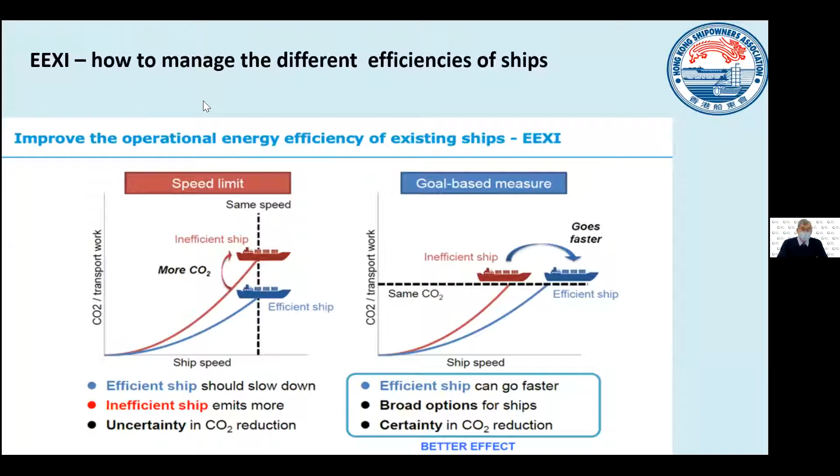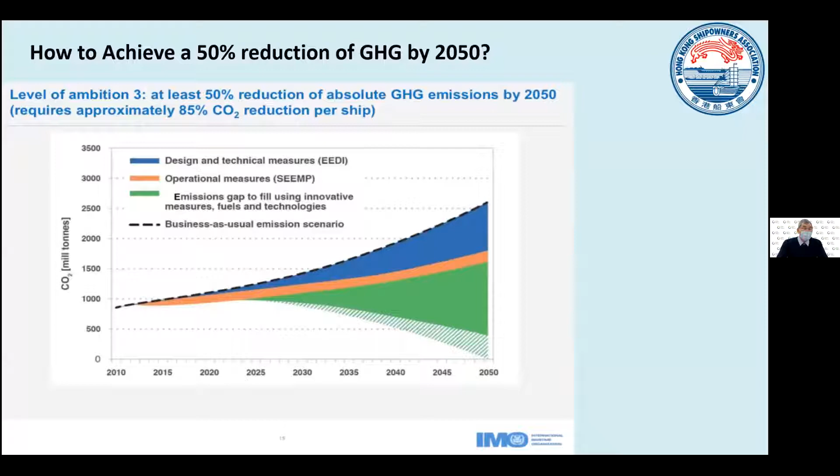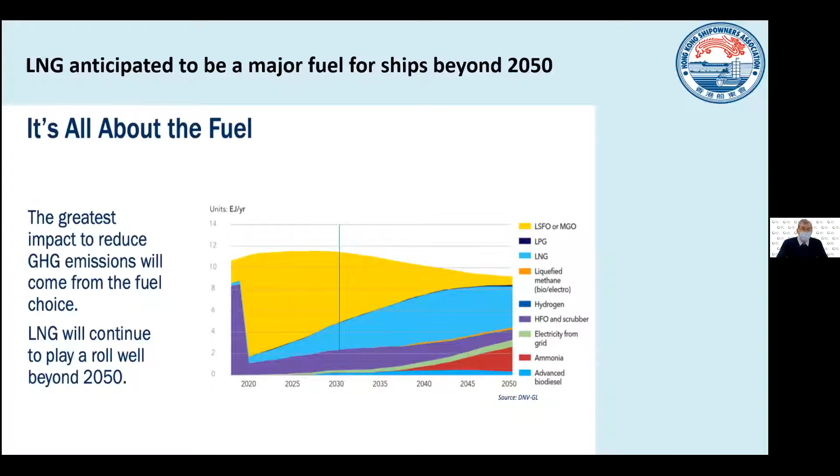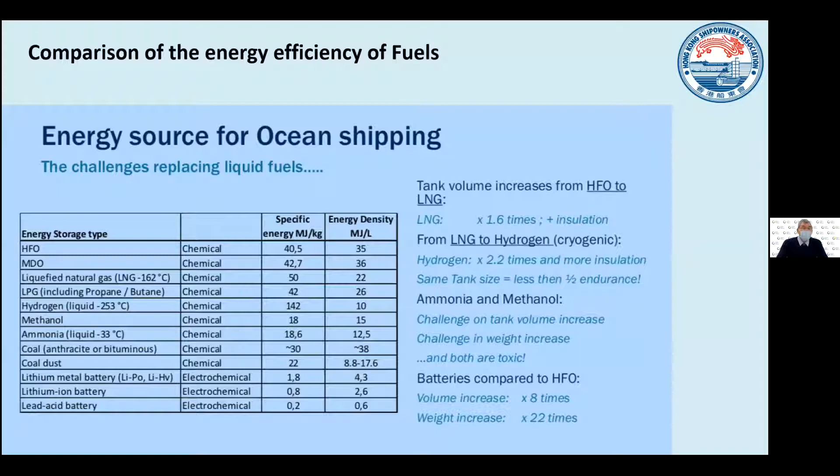Now, Clarksons has just come out with some quite interesting information, published in TradeWinds on the 4th of December, basically telling you how many LNG ships there are around at the moment. Excluding LNG tankers, they claim there's 227 LNG dual fuel ships on order, and there's 202 LNG ships trading at the moment. And the largest numbers are tankers, currently 34, and 72 on order.

Ferries, another one, 50 in service, 24 on order. Container ships are slightly lower, 11 in service, 30 on order. The offshore, well, there's quite a few there, but they're smaller ships anyway. But cruise ships is quite interesting: 7 ships in service, but 28 building at the moment, plus another 54 other types of ships.

The other issue is that there's actually LNG bunkering possible in 127 ports around the world, up from 114 at the start of 2020. Now, in most of these ports, the LNG can only be delivered by truck, which is very slow. So it's not really feasible for large ships to be bunkered by trucks. They need special bunkering ships, similar to the bunker ships used for bunkering oil at the moment. So the bunkering fleet is expected to double by the end of 2022, which is good news.

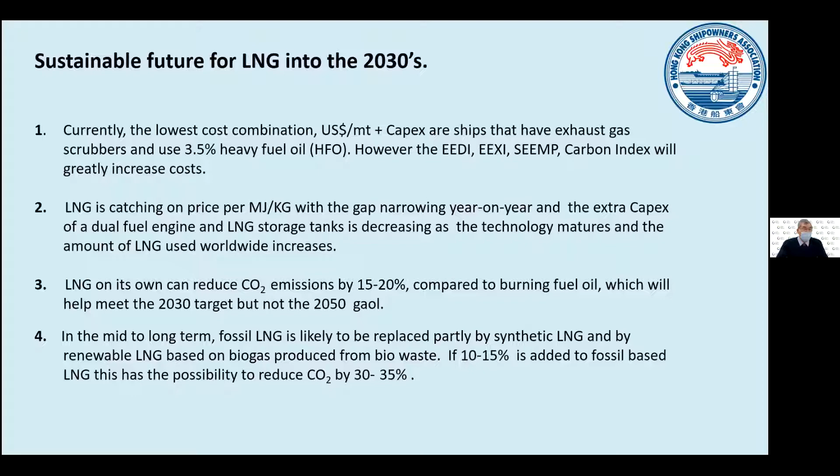Well, one of the reasons LNG can possibly continue is that if we can produce LNG from biogas and bio waste and mix it into the current fossil fuel produced LNG, that would increase the reduction of CO2 from LNG to between 30 and 35%, which is actually pretty good. But it's not going to produce 50% below, which is what we require by 2050.

So some outlook and conclusions. Well, LNG is definitely going to greatly assist shipping to get to the 2030 target, but on its own, it's not going to be able to get to the 2050 goal. So zero carbon ship designs are needed by 2025. They're well beyond the current state of the art. We do not have the technology at the moment. There's lots of talk about it.

There are some small ships being built at the moment to operate on hydrogen, but they're basically using compressed hydrogen at 350 bar at least. And they have to be bunkered virtually every other day. So this is not the technology which we can use for deep sea shipping, where we have long voyages and we need a lot of fuel.

So there's no obvious choice at the moment for alternative fuels, but we think that ammonia, sorry, where's it gone? Oops. Sorry. We think that ammonia is certainly going to be one of the main ones.

But one of the issues for shipping basically is we need to have a level playing field. So what we need is technically proven, safe and commercially sustainable new fuels, and we need regulations. And the IMO is going to produce those regulations. So we're looking forward to having these regulations which can produce a level playing field, which means that everybody can move ahead together and be basically relying on being competitive.

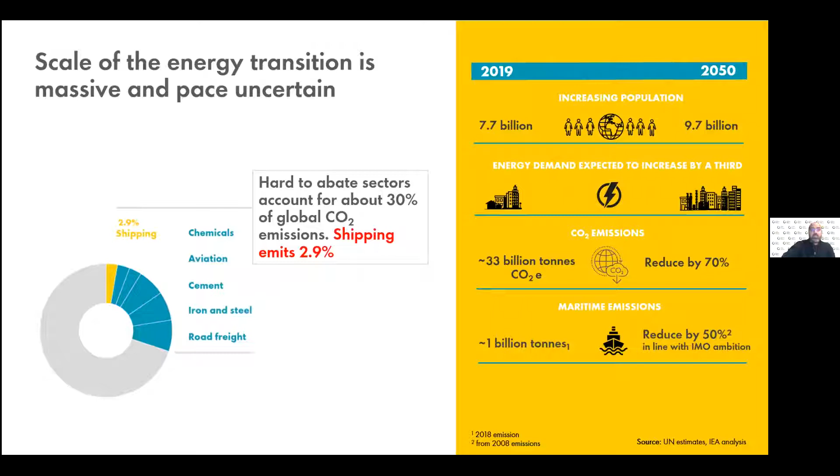Again, the scale of this energy transition required is massive for the world, but also for the shipping sector. Now, I think Mr. Cresswell mentioned that there's 50,000 plus, 55,000 merchant vessels. There's actually 93,000 vessels on the water. Again, the focus for us as well is on the commercial ships because they represent the majority of the energy consumption and as a result, the emissions footprint. So the scale and scope is massive. But the challenge to change is that much more difficult because of the underlying fundamentals of this industry. As I've tried to summarize in this slide over here, the switch to a decarbonized solution is going to take time, and it's going to take significant investment.

Let's not forget, this sector is just coming out of a major transformation. The industry went through the IMO 2020 change, which was challenging in its own right. And as much of a change as that was, the scale needed for the change to get to net zero is going to be that much tougher. Why? Because we're dealing with long asset lifespans, as Mr. Cresswell said. These vessels last 20 years, 30 years, 40 years. These are massive assets, so there's high energy dependency, and the complexity of electrification, as well as the industry being used to the cost of the fuel, makes the transition even more challenging.

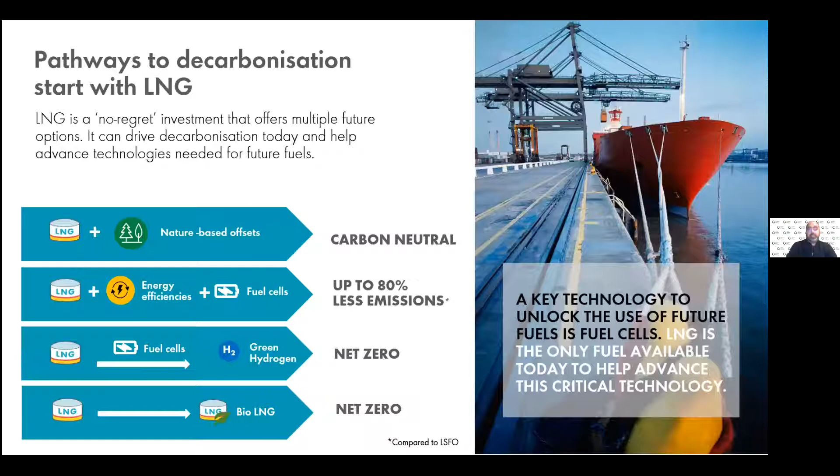Now, representing Shell, I have to do some shameless promotion as well. You may call this shameless self-promotion, but I consider this walking the talk. Not only are we converting our own fleet to LNG, we are committing significant investments to build the last mile infrastructure to make LNG available in key ports across the world. Mr. Cresswell showed that LNG is available at a significant number of ports, but most of it is from truck deliveries. What we're investing in is enhancing that capability and adding that last mile, the bunker vessel, to be able to do ship-to-ship operations. And we're growing that footprint at key markets globally.

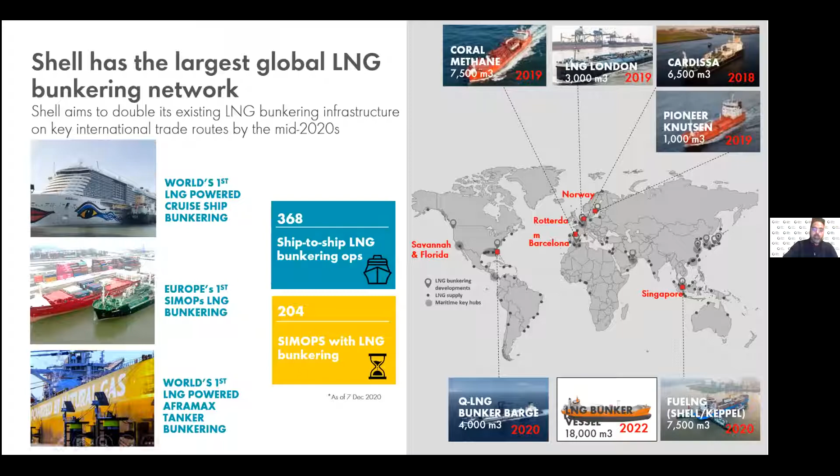So where does that take us? The Shell Deloitte study clearly laid this out for us. This is a collective problem that we all need to pull together to solve. Collaboration is going to be key to make this change to net zero footprint a success. The shipping industry includes ship owners, shipyards, class societies, financial institutions, regulators, end users of shipping service, etc. All these players need to work together in moving towards the goal of net zero.

Decarbonization needs to be the top priority of shipping industry's agenda, and it seems to be creeping up and getting there. Shell is ready and willing to play its part. We're working with others in the industry to look at how all of us can transition to a lower carbon future together. And we'll continue to work with customers as they adopt new fuels and technologies that help reduce emissions.

We're also working on decarbonization of our own fleet, as I talked about, but we're also implementing efficiency technologies in those assets as well. And we're continuing to invest in LNG as the cleanest, affordable alternative to traditional marine fuels available right now.

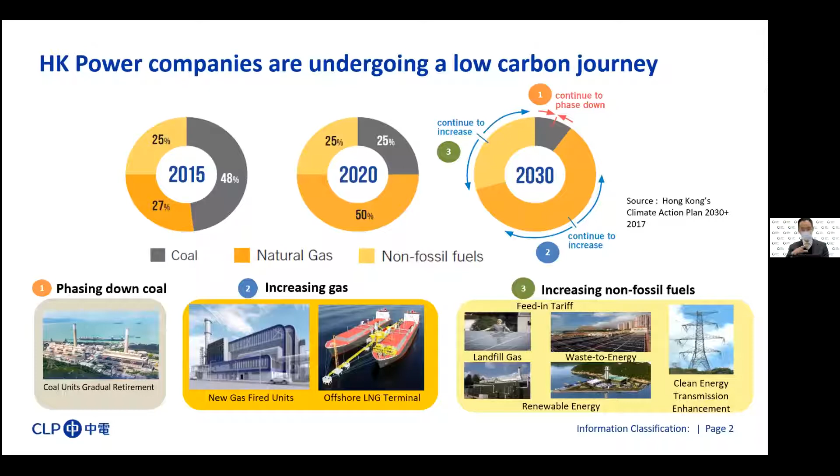There we go. Now, as you can see, to the south of Lantau, there will essentially be an offshore LNG terminal, which is in the form of a jetty, where there will be a floating storage and regasification unit, a ship that's parked more or less permanently, and then it will allow the LNG cargo ships to come into Hong Kong. And then there'll be two pipelines, one going to the Black Point Power Station of CLP, the other one going to Lamma Power Station of Hong Kong Electric.

Let me show you a little video of what that offshore LNG terminal looks like.

Are you not hearing music? If not, then I'll do

an impromptu coverage. So as you can see, the offshore LNG terminal looks like a jetty. It's essentially a jetty. On the right side, you'll see the FSRU ship. So you see the jetty here. And so on one side of the jetty, the FSRU ship would be parked, and it would serve two purposes. One is to store the LNG that's coming in. The other is to regasify the LNG into a gaseous form and send to the pipelines to the two power companies.

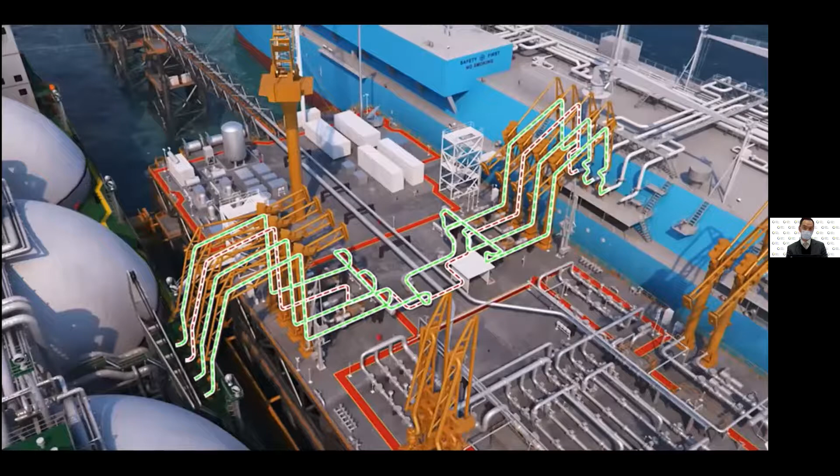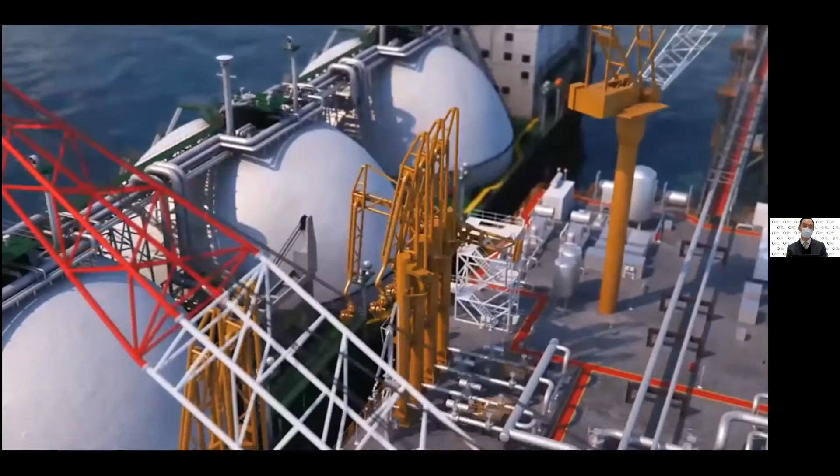And then on the other side of the jetty, the LNG cargo ships would come in. Okay, it's a relatively simple operation. The LNG cargo ship arrives, and the loading arms would attach to it, and the liquid LNG would be transferred onto the FSRU vessel for storage. So after the loading is completed, then the LNG cargo ship can continue with its own voyage back to pick up more cargoes.

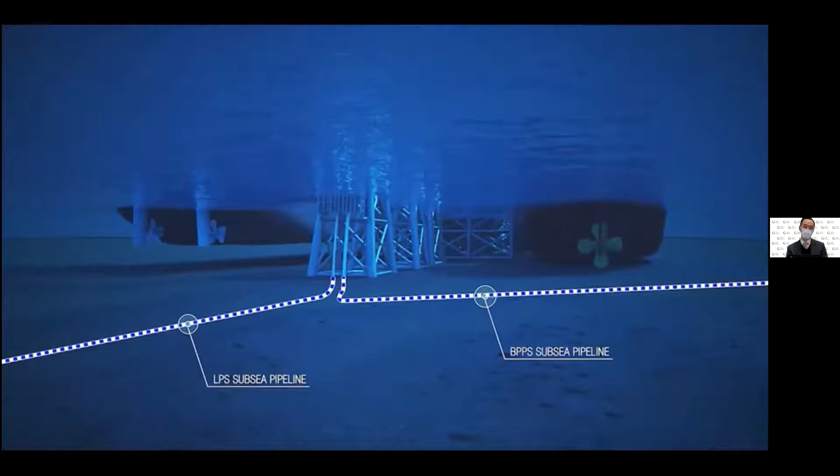And this is, as I mentioned, there's a regasification function on the FSRU, and it would basically turn the liquid LNG into gaseous form and transfer to the pipelines to be delivered to the two power companies for their power station use. So that's the Hong Kong offshore LNG terminal. It is under construction right now, and it is expected to be commissioned early 2022.

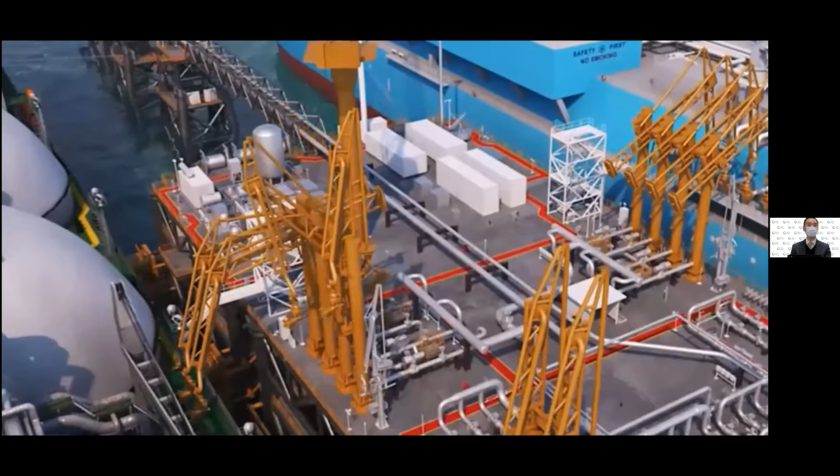Now, let's get back to the slide. Okay, whoa. Okay, there we go. Apologies about the size, but

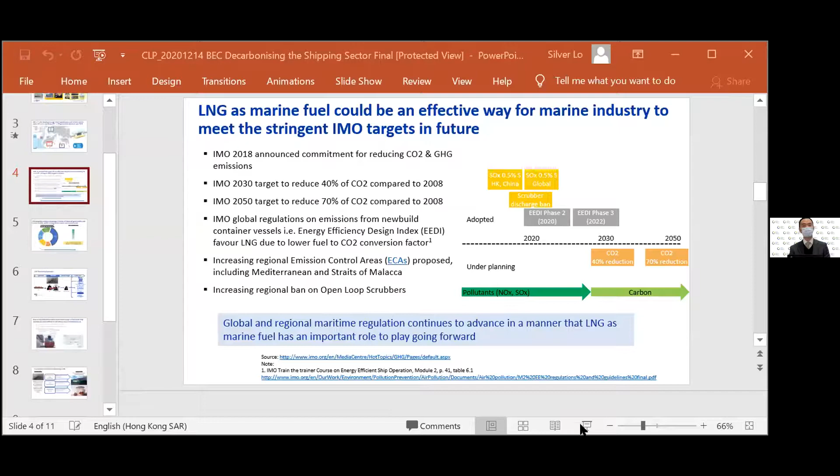basically I think Martin has explained that the marine industry is tasked to reduce carbon, just as everybody else in the world. Now, so all sectors in the community have a responsibility to reduce carbon, and the marine sector is no different. I won't go through the different regulations that are coming on the horizon, as Martin has elaborated that well.

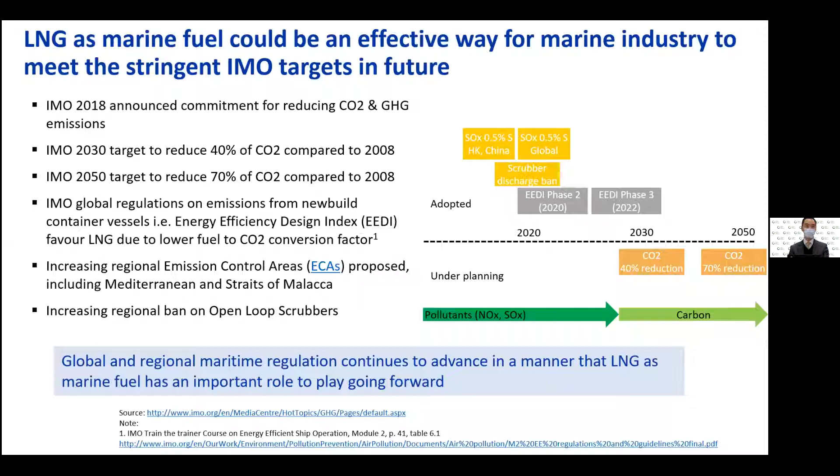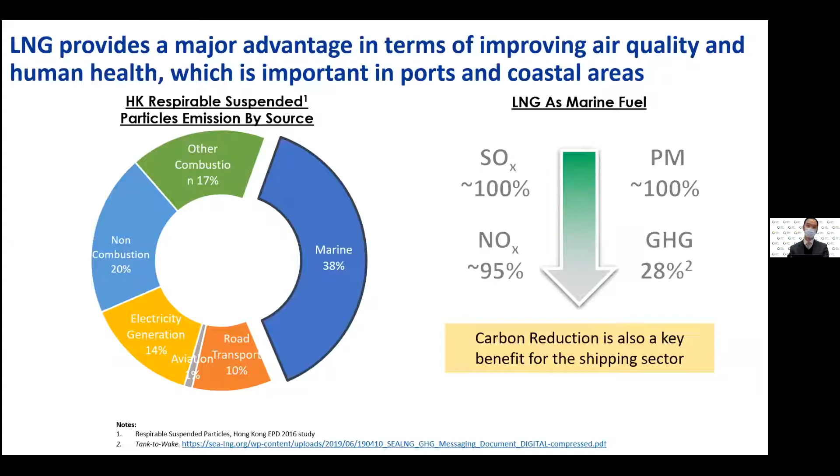I think the key point on this slide is to keep in mind that by 2030, the marine sector is expected to reduce carbon by 40%. By 2050, it's expected to reduce carbon by 70%. And LNG is actually a front-running fuel to help make that happen. Okay, now LNG not only provides the carbon reduction benefits, it actually virtually eliminates sulfur dioxide and particulate matter emissions. And it would reduce NOx emissions by 95%. So it doesn't only have a carbon benefit, but it also has significant air pollution reduction benefits as well.

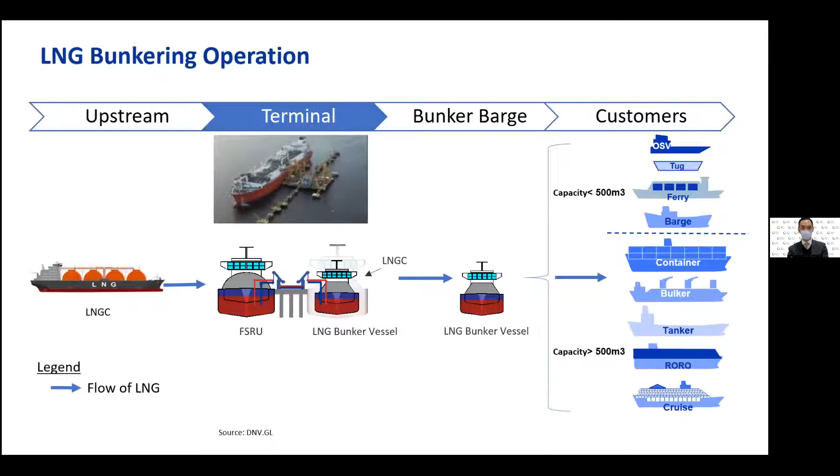Now, the LNG bunkering vessel, what it does is it will park onto the other side of the jetty and receive LNG from the FSRU unit. And what it would do is basically shuttle to the end user, who are the vessels, the container ships, the cruise ships that are parked elsewhere in Hong Kong, Kwai Chung Terminal, wherever. And that LNG bunkering vessel would deliver that LNG to the end customer and refuel the end customer vessels.

Now, for Hong Kong, and actually for most places, as Martin has explained, a lot of the refueling is done by truck, which is not an efficient means. And in particular for a dense place like Hong Kong, that's next to impossible to do if you have thousands of trucks shuttling around in the already busy roads in Hong Kong.

Now, what is the more efficient way of doing it, and it will become the common way of doing it, is by a ship-to-ship transfer. So that LNG bunkering vessel you see in red here needs to park right next to the customer vessel. And then as the customer vessel is doing its own thing, unloading passengers, unloading container cargos, the refueling would happen right by its side.

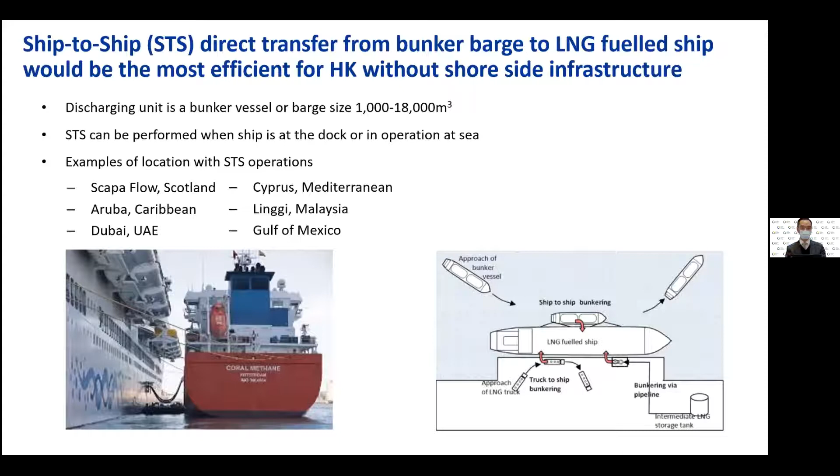And there are an increasing number of ports who can do ship-to-ship transfer operations in the world, because that's simply the most efficient way of doing it. Now that we have an LNG terminal in Hong Kong, I would say there are three things that need to happen in order to make LNG bunkering available and happening in Hong Kong.

Actually, before I explain the three key elements, I think an important point to note is that the whole marine industry is moving towards LNG as a key fuel, and there are many ports who are developing LNG bunkering capabilities. Hong Kong has been an important port and the world's busiest port at one time. And with this global shift, we believe that if Hong Kong can offer LNG bunkering services, it will help Hong Kong retain its competitiveness as an international port globally.

Now, what needs to happen in Hong Kong to have LNG bunkering materialize? We see three essential factors. Number one is that we need the relevant marine policy and regulations in place to allow this to happen, to regulate how the LNG bunkering activities would operate safely, and to allow the ship-to-ship transfer and the simultaneous operations to happen. The second thing is there will be a minor modification needed on the jetty itself. And the third thing is that there needs to be a bunkering vessel in Hong Kong to take the LNG from the terminal to the end users.

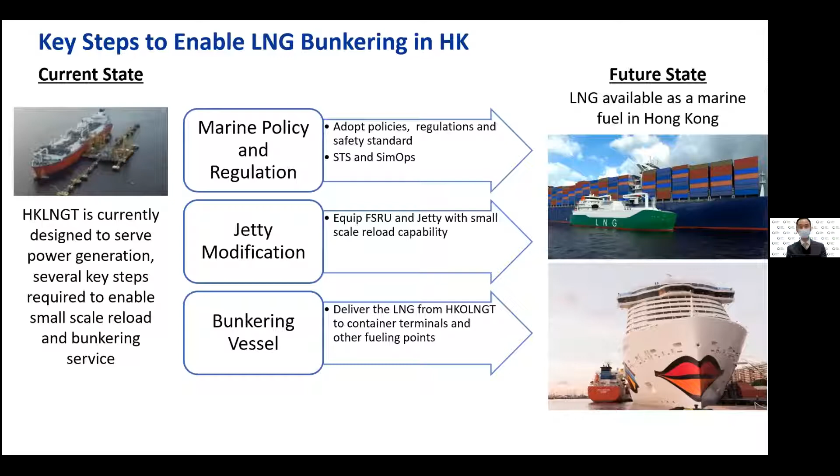And as I've just explained, Hong Kong was the busiest and most successful marine port globally. It's now still in the top 10, and in the future we see that LNG bunkering refueling capability would be a key element to help Hong Kong maintain that position.

So in summary, CLP is doing what we can to decarbonize the electricity sector. And given we have this LNG terminal facility, we believe it can also be put to good use by helping the marine sector reduce carbon. Offering LNG marine fuel in Hong Kong can enhance the competitiveness of Hong Kong ports, and we need full support from the industry as well as the government to have the relevant policies in place.